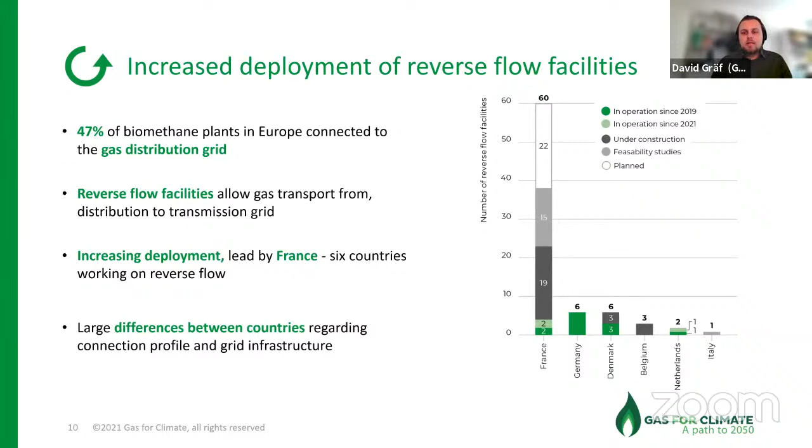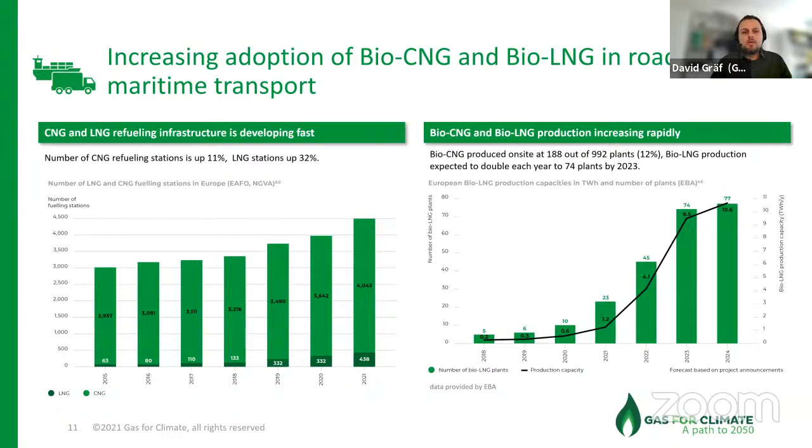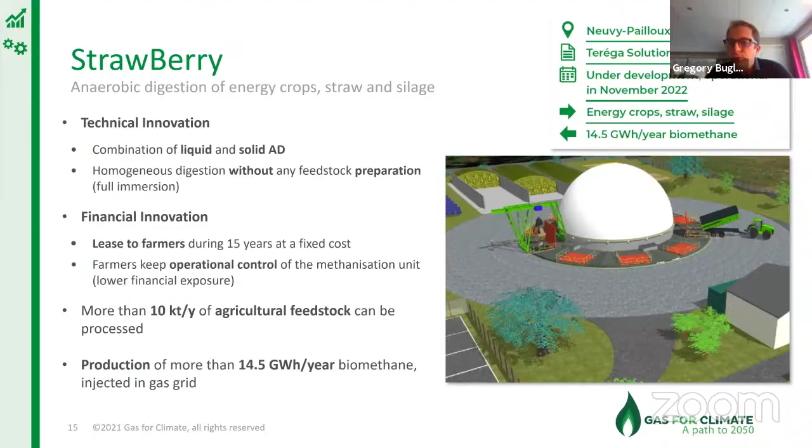The idea behind is to lower their financial exposure, and after the 15 years period, they will be able to either leave the unit or take full control of it and the property of it. So in terms of volumes, we are in the range of, for this specific pilot, 10K ton of feedstock per year, but we can go up to 15. Which represents around 15 gigawatt hours per year of biomethane injected into the grid. And that's pretty much it, Matthias, for Strawberry.

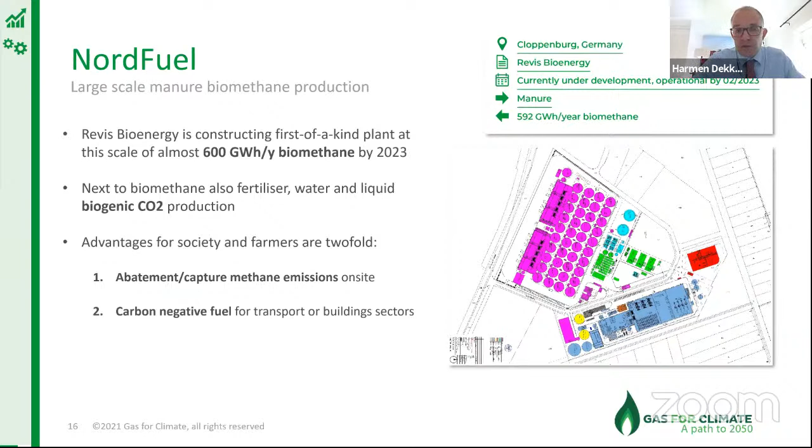It's a pleasure to present actually this fully industrial and fully circular project all at the same time, which will be the largest biogas production site within Europe, at least for the coming years. It took a few years of planning, I have to say. Hearing from the owners of this system, they will start actually building in February 2022, so in a couple of months' time, with an installation which will produce close to 12,500 cubic meters an hour of biogas, all renewable energy coming from mainly manure. And it's producing a gigantic amount of energy, 592 gigawatt hours.

But the beauty of it is basically it's a combination of both renewable energy as well as producing pelletized organic fertilizers. And on top of that, also liquid fertilizers in the form of ammonia water. Beside that, they produce also a lot of clean water as well. And to make it complete, they also liquefy the biogenic CO2, which is then sent to the industry and the greenhouses nearby. So it is the first of its kind within Europe.

Large, very large scale biogenic or biogas production. And placed in Germany, already the heart of the biogas sector within Europe. It is a promising way how the biogas sector is going forward. And I would like to leave it at that.

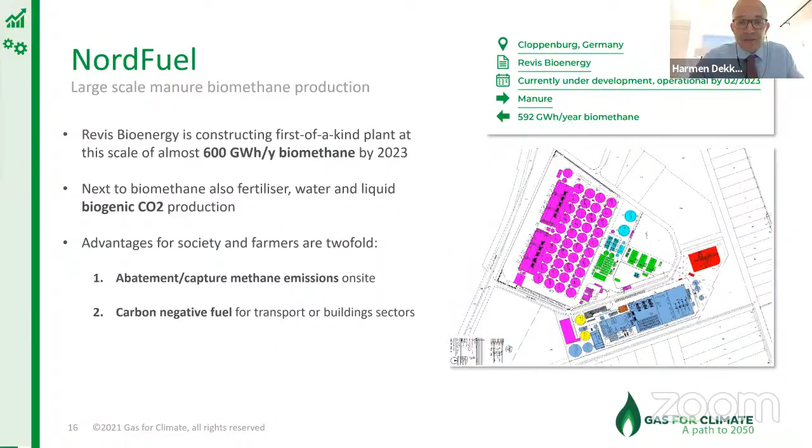Thank you very much, Harmen. So indeed, very impressive project, very large scale, and it clearly highlights, kind of proves the trends that were presented earlier by David, that we see a really, really strong growth in biomethane across Europe.

And with that, I would actually like to jump to our next topic, our next renewable gas, which is hydrogen. So in our next session, we will start off with the key trends that we've identified from this year on the topic of hydrogen, and then, similar to biomethane, have key showcase projects that make it a bit more tangible on what's actually happening on a project field. So here I would like to hand over to my colleague Jaro Jens, also from Guidehouse. Jaro, the floor is yours.

Thank you very much, Matthias. So today I will be presenting the key trends and market developments of the green and blue hydrogen sector. I will, just as the biomethane section, start off with the supply, then move to infrastructure, then demand, and then finally touch upon the national strategies and electrolysis targets by 2030.

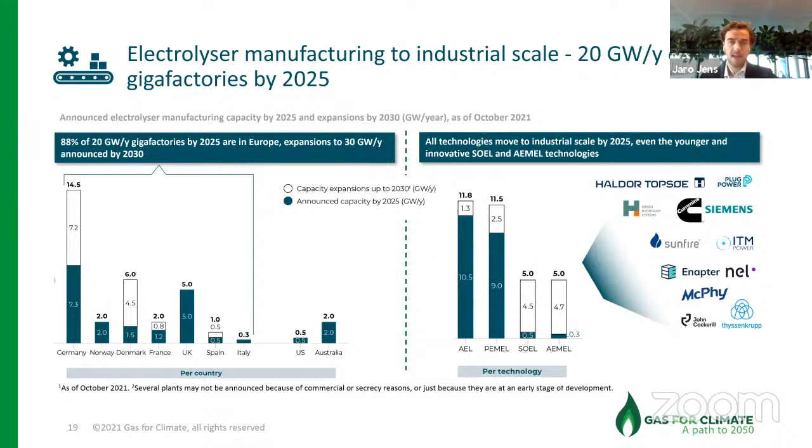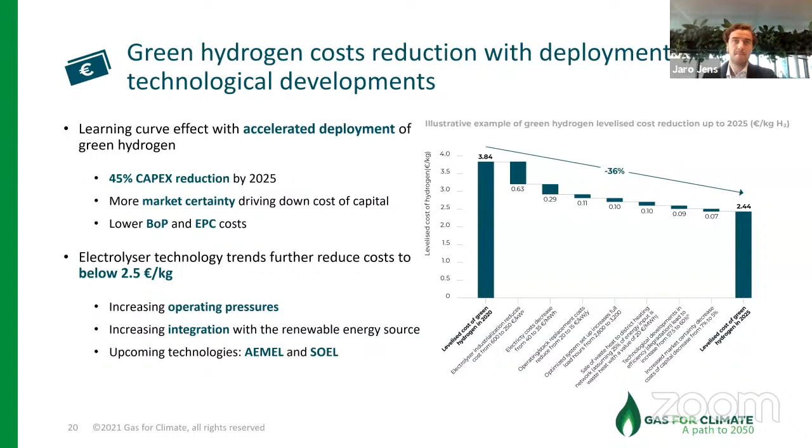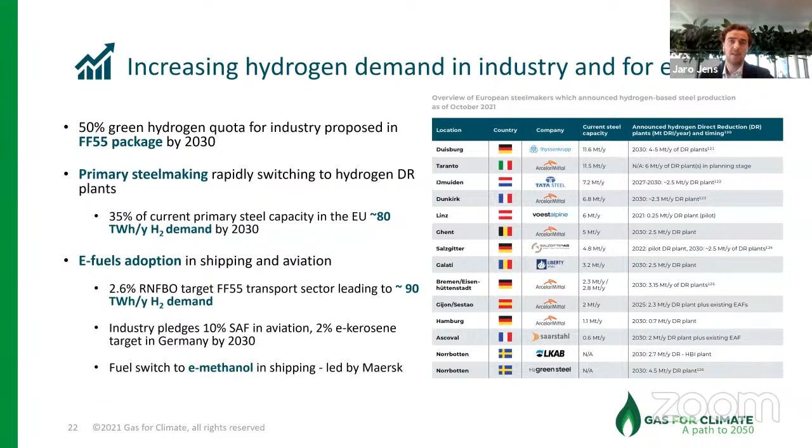We have also seen industry pledges. For instance, last week, Nike, Amazon, and IKEA announced that from 2040 onwards, they will only ship products using shippers who are completely carbon neutral. So you can imagine this will help accelerate the market, and a switch to e-methanol is, for instance, expected here, led by the largest shipper worldwide, Maersk. This will all have a large impact on hydrogen demand. We really foresee an acceleration and implementation of these hydrogen-based fuels, and therefore an increase in hydrogen demand. And then moving to the last slide, which is on the national hydrogen strategies.

So in summary, we think that the green hydrogen and blue hydrogen market is really accelerating. I think this is aligned with the vision we set out in Paris, and now we're all moving to implementation in Glasgow. We definitely see that the trends are in line with the pathway needed to get to net zero by 2050.

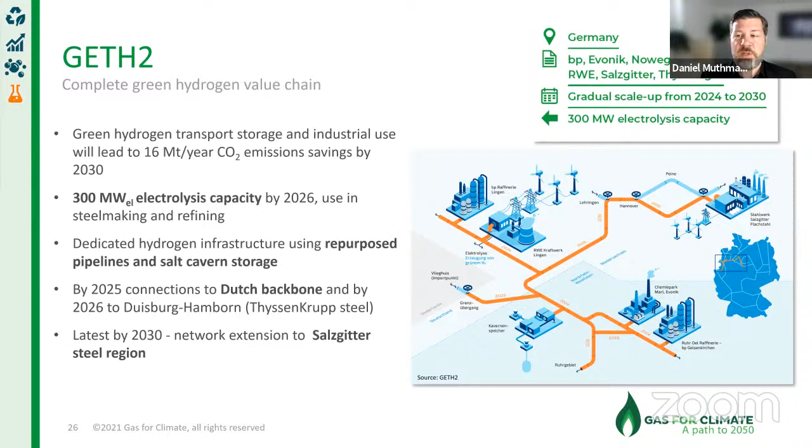And let's face it, as we have heard and are hearing at COP, we've done a lot of studies, we've done a lot of plans. Now it's about implementation. So this project will certainly be an important step forward in introducing the hydrogen economy in Germany and Northwest Europe. Back to you, Matthias. Thanks.

Thank you very much, Daniel, and especially for highlighting the importance of value creation and keeping the value chains in Europe and in Germany. I think that is a very key message here. And then our last key insight project, we can go to the next slide, will be presented by Eric Tamaske from the German TSO Ontras. Eric, the floor is yours.

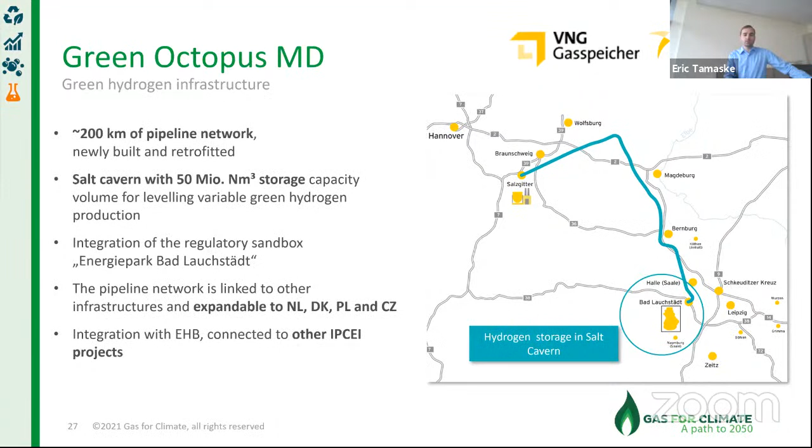I'm introducing the project Green Octopus Mitteldeutschland. It is a collaboration of the companies Ontras Gas Transport and VNG Gasspeicher. Ontras and also the other TSOs, as we already have heard, want to set up first parts of the European hydrogen backbone. So therefore, they started several projects in a call for important projects of common European interest, IPCEI. This project is also a part of the German shortlist of IPCEI projects.

The project Green Octopus Mitteldeutschland is connected to two other IPCEI pipeline projects with Ontras involvement. One is called LHyVE in the Leipzig area, and the other one is doing hydrogen transport, where the main focus is the connection between the German coast of the Baltic Sea and central Germany.

So what we want to do in this project is to establish approximately 200 kilometers of pipeline network, both newly built and retrofitted pipelines, between the steel mill in Salzgitter in the northwestern part of Germany and the industrial area of Leuna in central Germany. Connected to this pipeline, our project partner, VNG Gasspeicher, will build a 100% pure hydrogen underground storage with 50 million cubic meters of maximum usable working gas volume for leveling the volatile hydrogen production.